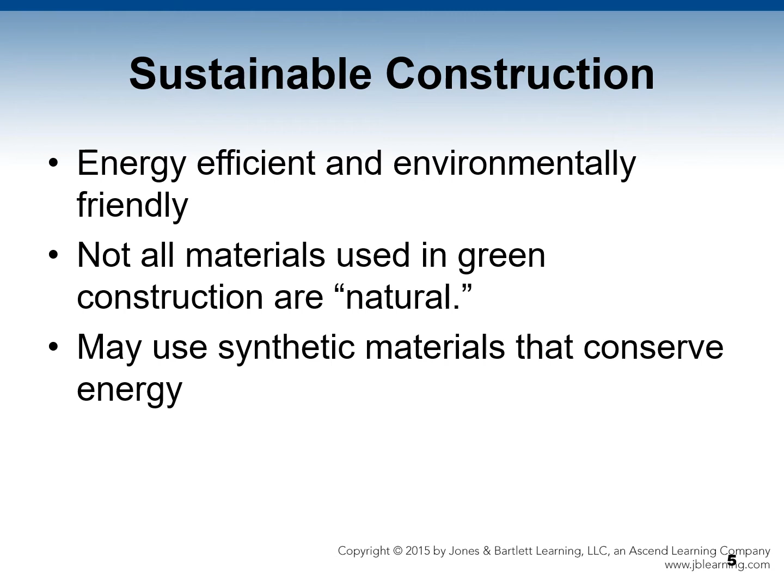Green construction is a relatively new term, but use of environmentally friendly technology is old. Some examples of older methods include sod-roofed houses, windmills, and water wheels. Sustainable construction is construction that is deemed to be energy efficient and environmentally friendly. Do not assume that all materials used in green construction are quote-unquote natural. Synthetic materials that conserve energy may well be used.

Now let's talk about Leadership in Energy and Environmental Design, also known as LEED. This is a rating program by the U.S. Green Building Council. Its stated objectives are to lower operating costs and increase asset value, reduce waste sent to landfills, and practice conservation of energy and water. Construction should be healthier and safer for occupants. Their objectives also include reduction of harmful greenhouse gas emissions, and people that use this type of construction qualify for tax rebates, zoning allowances, and other incentives in hundreds of cities. All of those are objectives of LEED.

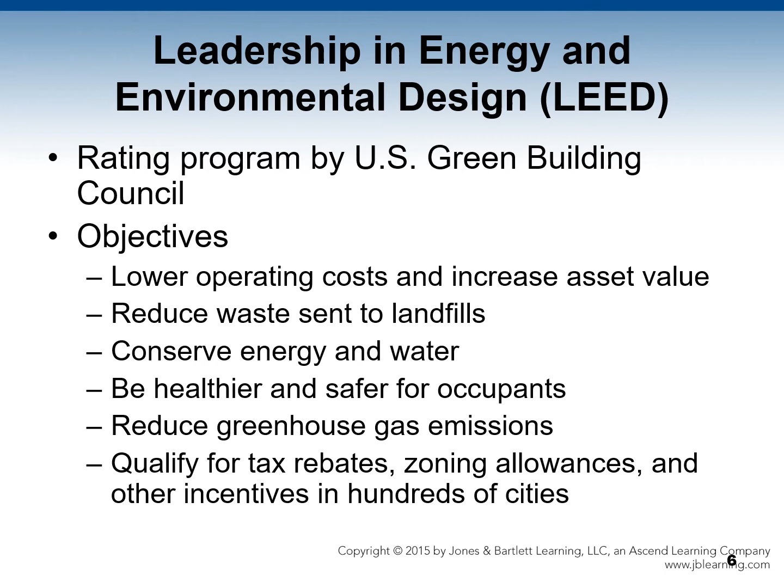Here's another thing you need to know about a program called the Building Research Establishment Environmental Assessment Method, with the acronym BREEAM. It's a worldwide program, and it assesses the quote-unquote greenness of buildings.

The code enforcement community plays a role here. Green rating systems don't deal with fire issues directly. The 2012 International Green Construction Code attempts to regulate green construction, with coordination from the International Building Code and the International Fire Code to help with fire rating systems in green construction. Though many of these materials and methods are old, there has never been such a movement worldwide to push green, environmentally friendly construction to the point where we now have nationwide and worldwide standards.

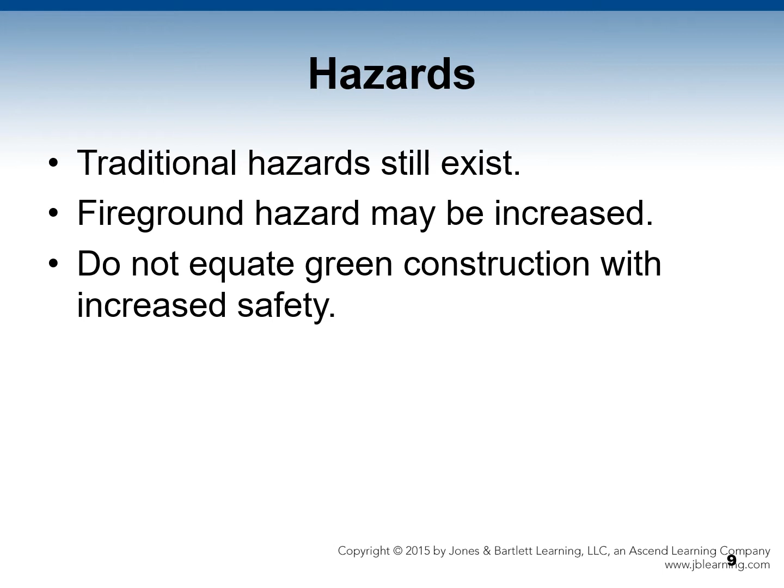Now let's talk about some of the eco-friendly materials or green materials. One of the most popular and increasingly used materials is bamboo. It's a quick growing plant, so it's a resource that's able to be harvested quickly, and it's used for everything from furniture, structural laminated beams, curtain wall panels, to trusses. Now it's used quite a bit in flooring as well.

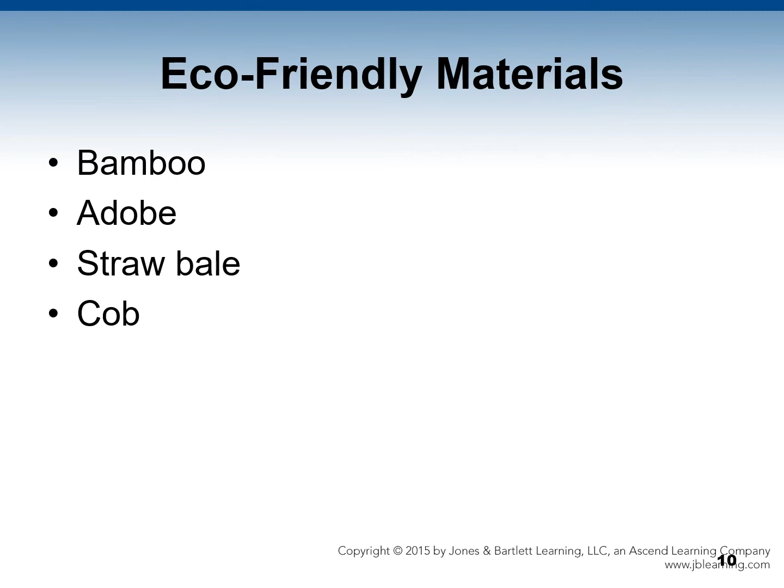We also have biopolymers being used as an eco-friendly material. Biopolymer is a green plastic, quote unquote, made from renewable living sources, and is used for insulation, building blocks, lumber, roofing shingles, and tilt-up walls.

One has to remember that fire testing and experience with these materials are lacking, partly because there has been such a large influx of these materials that ASTM, NFPA, NIST, etc. take a while to build up proper testing for all the different modes these materials are used in. It takes time to develop that testing before it can be turned into codes and standards.

Another eco-friendly material, believe it or not, is ammonia. It's an old refrigerant from the 1870s, and ammonia is extremely hazardous. In the old refrigerators, when it was used as a refrigerant in a closed system, if there was a leak in the line, literally hundreds of people died from early refrigerators.

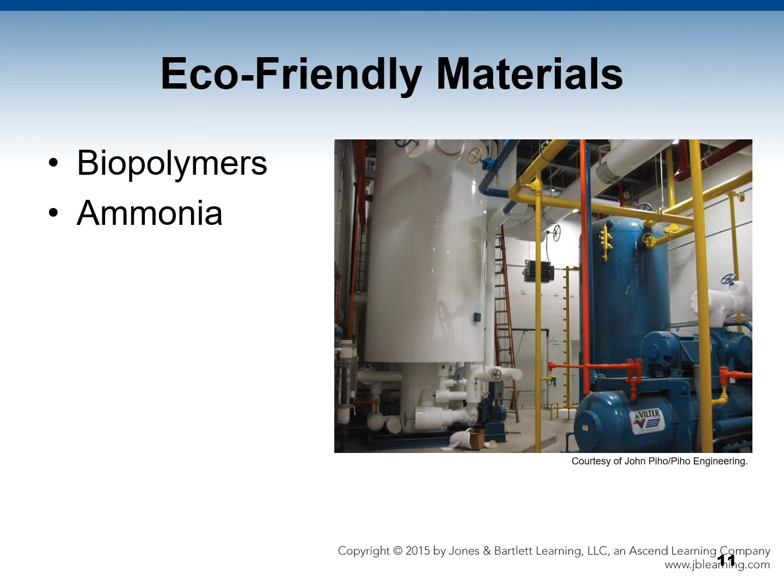So that's definitely one material that may be considered eco-friendly, but I literally never see it that way. I respect it from a fire standpoint—it's a pretty dangerous material.

Let's talk now about energy conservation. Synthetic insulating materials save energy, but they are toxic when burning and are difficult to recycle. Vegetation as insulation saves energy, but if it's dry, it's combustible.

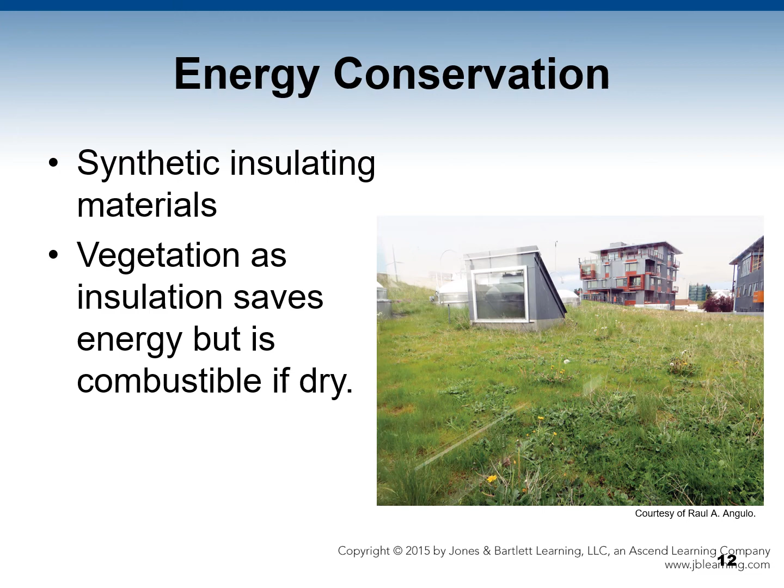Some other measures taken to be more green in terms of energy saving include polystyrene insulation, which is a spray-applied foam or used as a rigid plastic insulation. It may be energy saving, but plastic, when it burns, is really bad news because it gives off serious toxic fumes, sometimes a multitude of them, and can generate a lot of smoke.

With polyurethane insulation, there's often also a rigid plastic insulator, so it can be used singly as an insulation or as a plastic insulator, sometimes as both. It is often used in stud channels in walls.

There are also radiant barriers—these are flexible reflective membranes that are added to attic spaces to reflect heat.

Glass can be used as an insulating material, but daylighting involves increased use of glazing. This helps to light spaces naturally without quite as much radiant heat and glare.

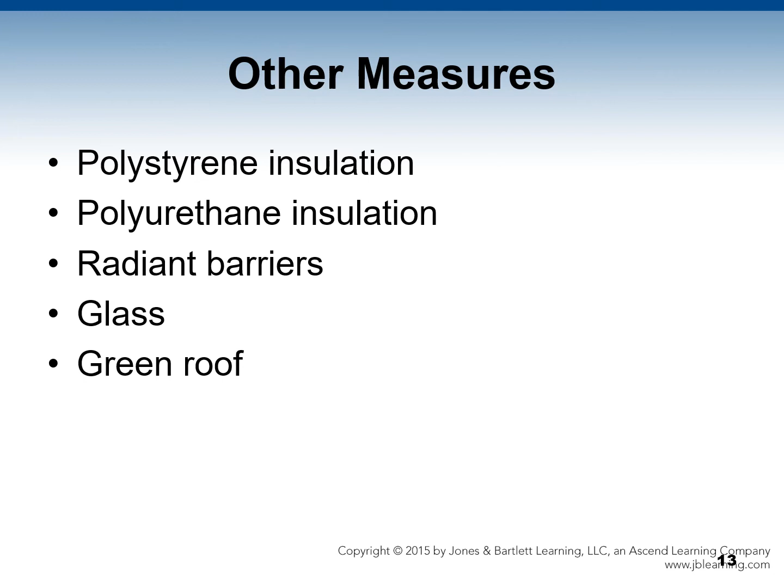Now, walls, as we know from previous chapters, can influence fire behavior. There has actually been little actual fire experience with green walls, so if you encounter this situation, rely on your intuition.

Then there are heavily insulated walls. I just talked about literally over-insulating a building, and in the mode of energy conservation, you're going to encounter heavily insulated walls at some point. These are made with structural insulated panels, and there can be studless wall assemblies using a core of polyurethane. They're designed for energy efficiency, but you have to remember that these super insulated panels are highly combustible.

Polyurethane smokes tremendously and gives off a lot of toxic gas when it's on fire, and these walls are prone to collapse because, since it's a studless assembly, there's no framing underneath to hold it in place. So you need to know that green walls and heavily insulated walls can collapse on you, and that they are highly combustible.

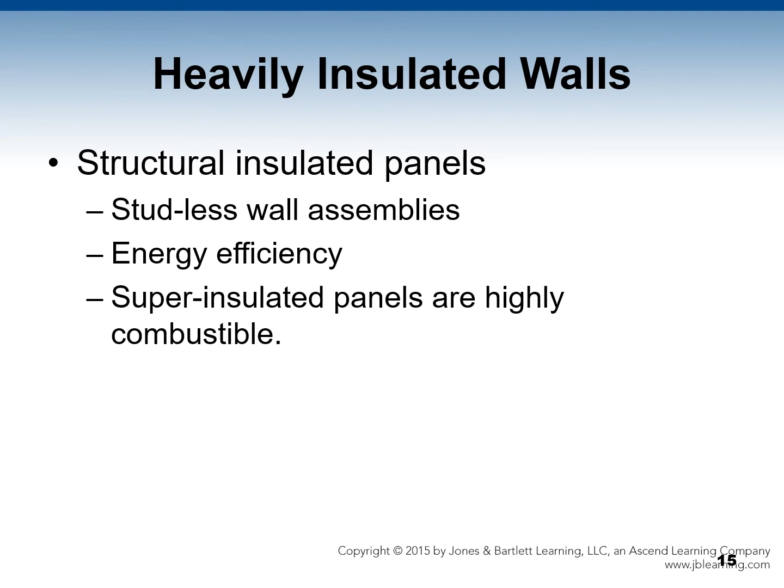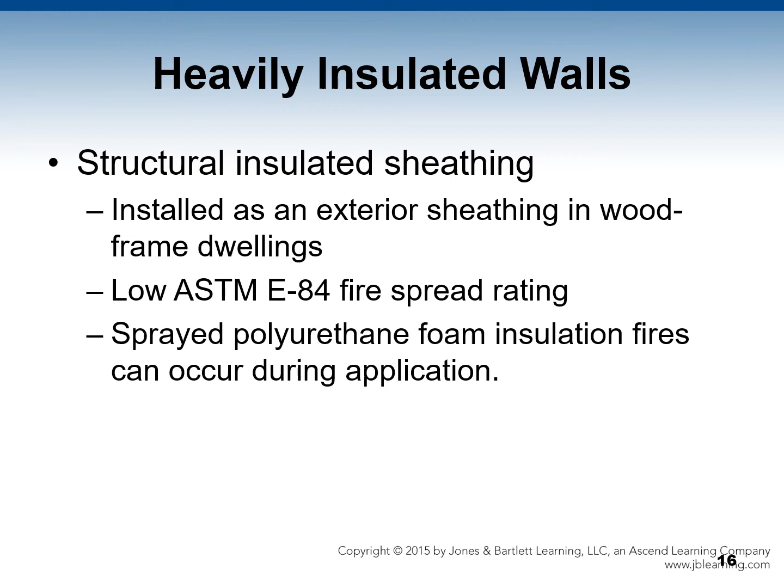Now we're going to talk about materials known as green concrete. The first is what's called ICF wall panel systems. ICF stands for Insulated Concrete Forms, and they have a lot of advantages. One is that they can make a house or building waterproof and airtight, and those are both good things.

However, airtight is a problem, especially if there's a fire involved, because the building doesn't breathe on its own quite so much. It traps a fire's heat inside the building or house because it's airtight, and that interior temperature will skyrocket.

The next type of green concrete we're going to discuss is what's called a trombe wall, and this is actually kind of a cool system. It's a set of glass exterior panels and concrete block walls, with a void space between them. This glass is purposely not insulated, because the heat comes in through the glass and is trapped by the concrete wall behind it.

There's a void space between them, and it's neat because it traps sun-heated air and delivers it to adjacent living spaces through a series of one-way vents. So it's a great way of providing natural heating without using gas to run a furnace. However, it is still a void space, and it's going to be pretty warm in there, so there are some fire ground disadvantages. It's a pretty benign system and the materials are fairly stable, but you still need to know that it's there, that it can get really hot in that void space, and that there is a void space.

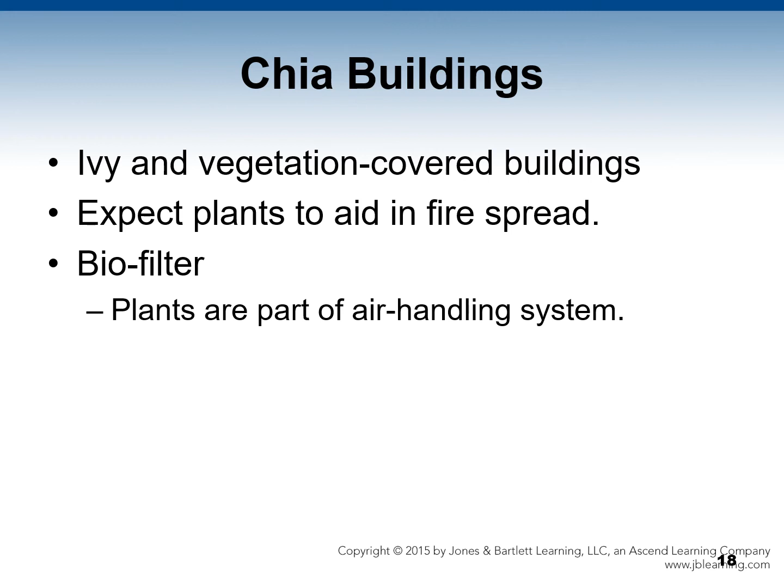In the past 15 to 20 years, you've seen material come about that's known as plastic lumber, made from recycled plastic waste used for decks, boardwalks, furniture, trash cans, and things like that. It's great because it's made from recycled plastic, but you have to remember from a fire standpoint that its combustibility is the same as the original material it was recycled from. So it is eco-friendly, but when you're dealing with a fire and that material is present, you're going to have that high combustibility rate and the same smoke hazard as the original material it was recycled from.

Let's talk a little bit about firefighting accessibility and green construction. There is now widespread use of trees and shrubs to shade buildings, and that is great, but it may impede firefighting access. So that's something to bear in mind.

Also, you might see drive zones or fire zones that use materials other than regular road pavement. Any type of material other than asphalt, like pavers or anything like that, should be inspected and tested for fire access roadway materials. That's not the role of the fire department, it's the role of city planners and construction contractors. However, it is important to know that you may encounter them, and there is responsibility at some point for any material other than asphalt to be inspected and tested to hold the weight of a fire engine, and also allow that engine to roll safely and smoothly.

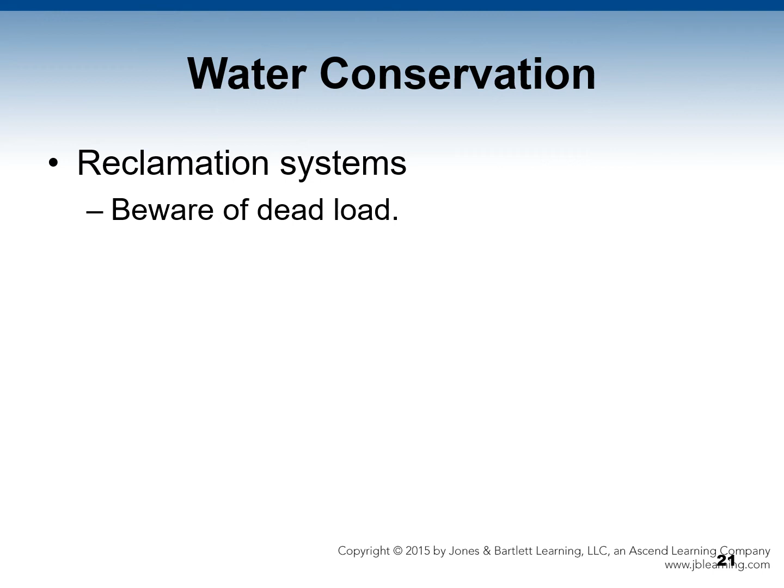So be aware of the dead load involved. If those tanks are full, especially, they're going to be very heavy. Make sure that you're aware of the use of those tanks and whether or not they're present, and always just assume they're full, because the more full they are, the more heavy they're going to be.

I just mentioned gray water, and gray water is wastewater from industrial processes, laundries, and other sources I mentioned, like showers, hand washing sinks, etc.

This is more commonplace for firefighting use, but you need to not confuse it with black water, which is sewage. You need to be aware of black water tanks and gray water tanks, and they should be properly labeled, and you really want to make sure that you're hooking up to a gray water tank.

Anytime you've used gray water, and it's perfectly fine to use for firefighting, you need to make sure that all apparatus are flushed afterwards with potable fresh water. Also ensure that the fire apparatus access roads do not have water tanks below the driving space, which you may encounter as well.

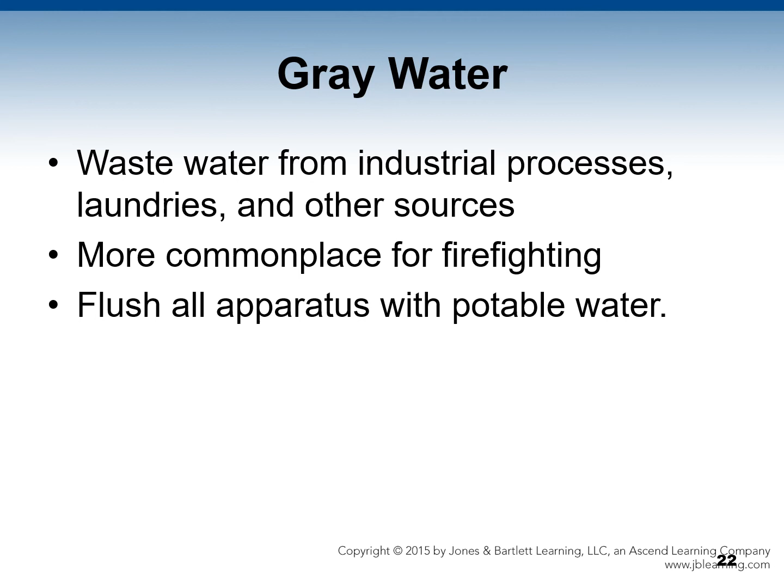Along with all of the eco-friendly and environmentally friendly and green types of construction, you now have energy generation on site. More and more Americans, and indeed countries around the world, are installing their own energy generating systems, and these are a variety of different systems that are available.

The first we're going to talk about are roof solar systems, and these are made up of what are called PV roof panels. These incorporate individual semiconductor cells that react to energy from the sun and generate direct current, or DC electricity.

And these systems are now being incorporated not just at home on the roof of a house, but now into roofs and wall building surfaces, or they may be freestanding on their own. You may have seen what's known as a solar farm, where you have row upon row of solar panels that collect heat and provide electricity.

Especially in the western and southwestern United States, although you're starting to see it in other parts of the country as well, you've seen parking areas that have awnings or shade over them, and especially the new ones now, what was just wasted space is now being used for energy conservation or energy generation. So they'll be covered with solar panels or PV roof panels.

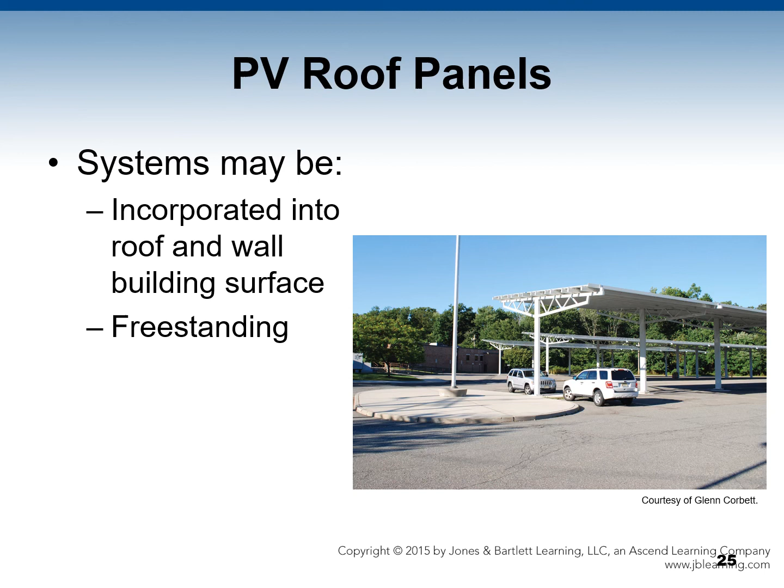Potential hazards you might encounter in an environment that's using self-sustaining energy generation are electric shock, of course. There's dead load weight, the weight of the panels, and some of the apparatus that go with them. And if there's a penetration of these panels, there may be a release of hazardous materials.

You've also got to remember that the electricity is generated and then stored in a small or even a large battery farm. So make sure you're aware and remember that those batteries are going to be pretty close to the area where the energy is being generated.

Some firefighting precautions: make sure you do not break or cut through PV or solar panels or any of the associated equipment.

Definitely make sure before you do anything that the system is de-energized. This includes the inverter, which is the device used to convert DC into AC that's used by the building. It generates DC, but everything is built to an AC standard. So you need to make sure the inverter is turned off and all power is turned off.

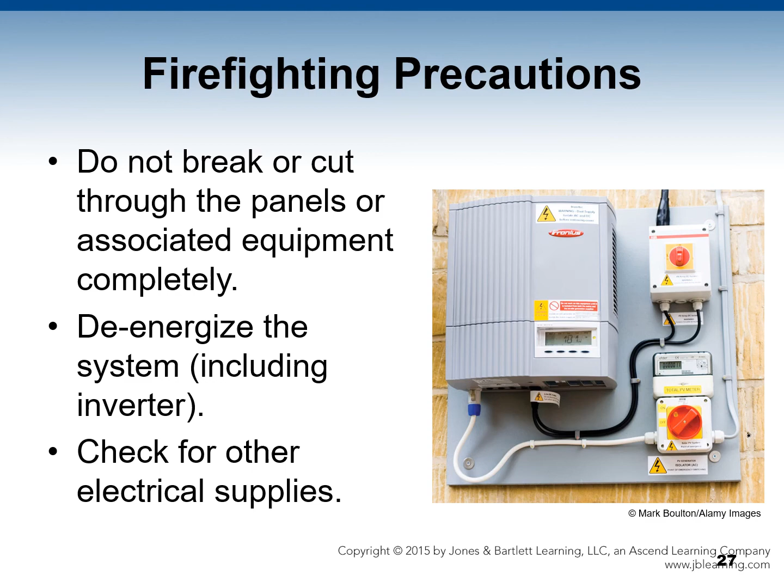Also make sure you verify there are no other electrical supplies for the building. Sometimes houses are off the grid, generating all their own energy, or a house is still hooked up to the grid. If there's a period with a lot of snow, storms, or cloudy days with little to no energy generation because the sun is obscured, the house will convert over onto the grid. That's another electrical supply you have to be concerned about.

Some recent fire incidents involving PV panels: one fire occurred in 2010 in Bakersfield, California, where firefighters were unable to de-energize the system. In 2012 in Trenton, New Jersey, workers prematurely activated the system. And in 2013 in Delanco, New Jersey, the largest PV panel related fire in U.S. history occurred.

Definitely take the time to look these incidents up and read about the details of each so that you're well educated and prepared to deal with them being present at a fire scene.

Make sure that you are aware of conduits and conductors. Locate conduits and avoid them, as they may not be labeled.

Especially in recent years, you've got the advent of not just large PV panels, but what are called solar shingles or PV shingles. These are building integrated photovoltaics. In other words, they serve not only as individual shingles for energy generation, but also as the building's shingle system itself.

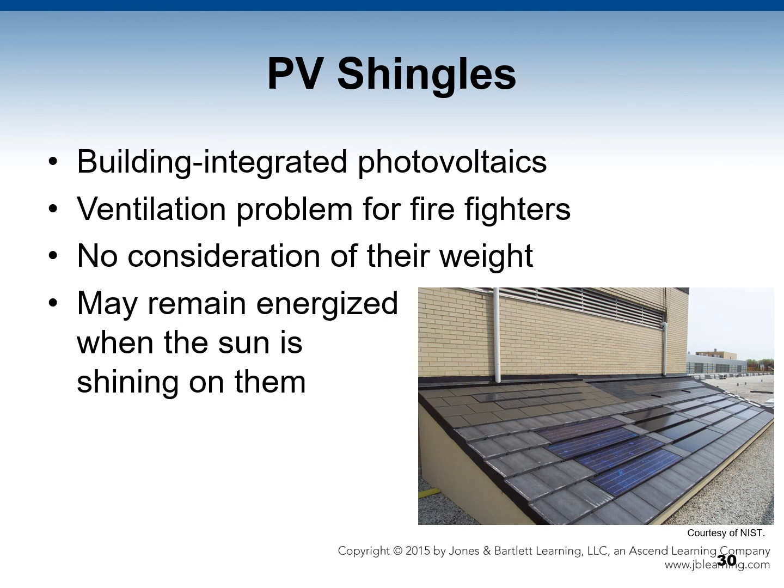You also have a new technology called flexible laminate solar panels. These can be applied to buildings, boats, and even tents. They're pretty neat because they're literally just flexible solar panels, very light in weight, and are being increasingly used in RVs and all types of places you'd never be able to use solar energy before this technology came about. But as far as firefighting hazards, the same rules apply as with PV panels and PV shingles.

So you've got the same hazards: inverters, battery storage for energy, and energy generation storage, and so forth.

I also mentioned completely off-grid systems, which are PV systems not connected to a traditional public electrical grid, often located in rural areas. You have the same problems as with PV panels, plus an additional problem: not only is there battery storage like we discussed before, but large scale battery storage, because they're completely off the grid. So they can go for several days with heavy cloud cover and still depend on energy that was generated and stored in a battery system. But these batteries are much larger in scale, or you've got many more of them.

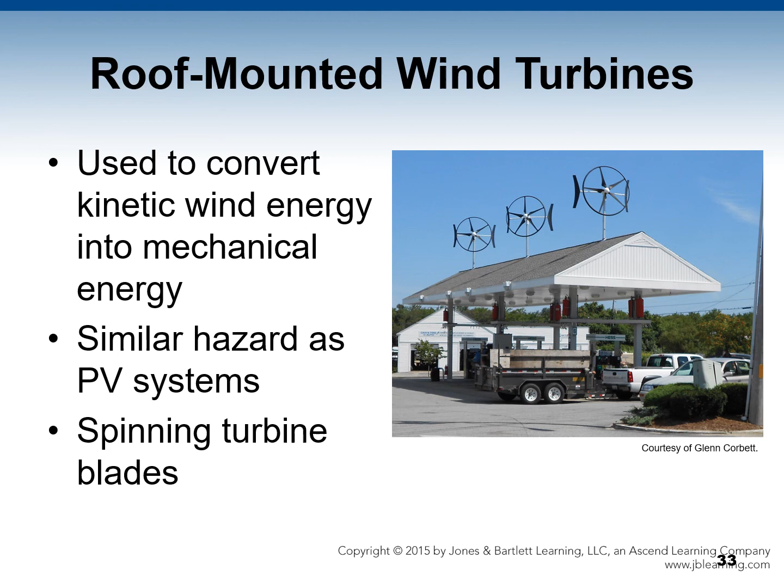There are also solar water heating systems, which harness the sun's energy to heat water or some other type of fluid. Active systems use a roof-mounted collector, pump, and heat exchanger. Passive systems use a batch collector.

Roof-mounted tanks increase substantial dead load, so be aware of what you're looking at when you roll up on a place. And as I've mentioned in the past, know your fire response area.

Note where locations are that have roof-mounted wind turbines. Know where PV shingles or PV panels are in use, or where solar water heating systems are in use. Know your area so that you can be aware of potential hazards should you ever have to respond to any one of these systems, because they can look very similar, so you definitely need to get out and know your response area.

And when it comes to solar water heating systems, remember these lectures are simply to supplement the text. Read the text and even read outside resources so you can collect good, detailed information about each of these systems, specifically what they do, how they perform, and all the equipment that comes with each of them.

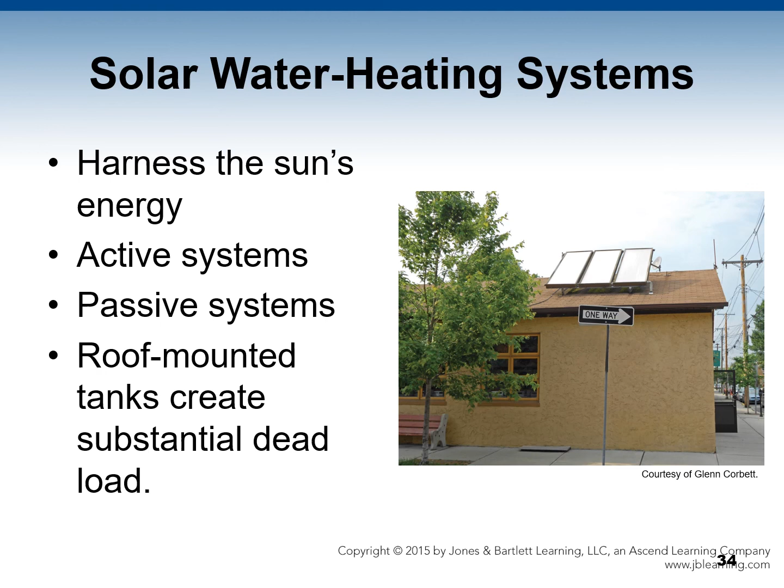So let's summarize everything we've gone over in this chapter. We talked about the fact that green construction is proliferating in response to environmental and energy concerns. The materials used in green construction are not necessarily natural materials, and we talked about quite a few of those. And make sure you remember to not equate green construction with safe construction — they are two different things.

From a firefighting perspective, green construction can be categorized into four categories, which we talked about: eco-friendly materials, energy conservation, water conservation, and energy generation. Each green construction system and material presents different potential firefighting hazards, and pre-planning is key to locating, identifying, and understanding those dangers.

And you need to know this not just in terms of green or eco-friendly construction, but about building construction and all the things we've talked about in previous chapters. So definitely get to know your area of response and specifically be familiar with green or eco-friendly construction and energy generation, because the use of all of those things is growing very rapidly.